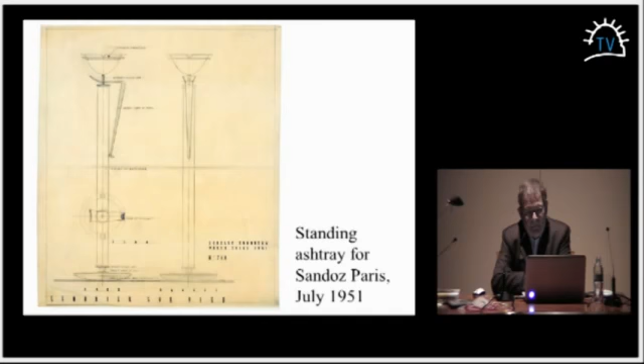This is fairly strange because it's a study for a cornice in reinforced concrete. It's studied at full scale, and it's related to the attic, the 6th floor of these labs at Sandoz at Orléans. And there you have the combination of the variation, you might say, of the sketches at a very small scale.

This is a detail of the attic. And this is a goutte pendante. This is the phenomenon: how are you going to cope with the rain? It's a joke. It is a joke. And his dessinateur, well, he was using in his office in Paris, as well as in his second office in Lausanne, his best students to do his office work. And this drawing has been done by one of his students. And this is, you might say, a caricature of the boss, of the patron. That was the word they used in French.

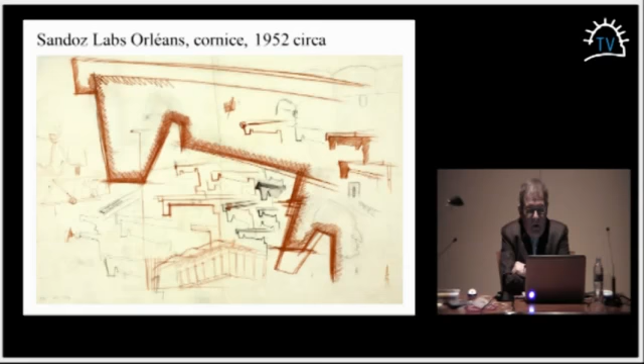Now, coming to his formation in Paris, he was integrated, or he chose to go into Emmanuel Pontremoli's atelier, and he was constantly participating in competitions. So to get this first medal, the Concours Rougevin, an annual competition they had at the school in Paris, the program itself was the study of a postage stamp. And what did he choose? He chose to combine some of the main monuments building the silhouette of Paris, whether modern or ancient buildings, and the top of the cupola here is, you probably know this building, the Pantheon.

Now, it's very impressive to look at the concentration of the intensity. We find simultaneously the use of the variante. It's a study for an armchair. It's very small. Tschumi followed the advice given to him by one of his masters, Jacques-Émile Ruhlmann. Ruhlmann was a cabinet maker. He was producing furniture in his atelier, in his shop. He's one of the leaders of the Art Deco movement. Ruhlmann's success first came into international notoriety during the 1925 exhibition in Paris.

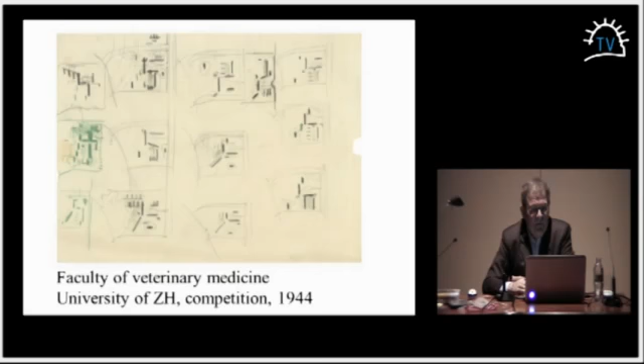But the strange thing about Tschumi is that when he's developing an architectural project, in this case a competition for a veterinary medicine hospital at the University of Zurich, he's doing exactly the same to find what is called the parti, which is the way you're going to treat the various parts of the program into a whole. So he's studying this at small scale, using the so-called, this is Ruhlmann's word, postage stamp technique, in order to participate in this competition. And there is an enormous intensity, and I would say beauty, in these sketches.

And the strange thing is, I know many architects who wouldn't keep these as documents in their archive, but there are thousands. I'm not kidding when I say thousands of such documents have been kept by the architect. Why did he keep them? Because he thought, I might want to refer to that for another commission, and so I'm going to gain time. Or I might want to give this sketch or idea to one of my collaborators, he's going to develop it, and I'll go back and see what he's doing. So he has kept everything. I know that Luigi Snozzi always eliminates this kind of nonsense. But this is full of sense for Tschumi.

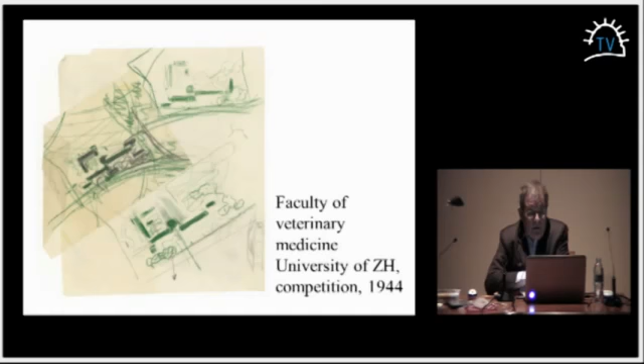I'm friendly with these people from Barcelona, Esteban Bonell and José María Gil, and they're practicing the same technique, mixing the various scales. These are sketches for a library in Lérida. They didn't win that competition. So it's a coincidence, you might say, in a way. There is a lot of precision in such a drawing. And you see the relationship between the furniture and the cornice, or the configuration of the building. This portico is like a table within the library.

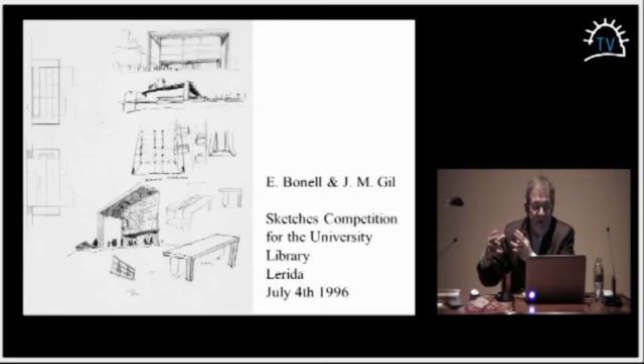Well, it's a coincidence, and this is purely empirical, and I was glad to find this in Tschumi, because I developed the research on Tschumi after meeting Bonell and Gil, and the two things were growing together. Now we arrive to this idea of another theme in architecture. It's the practice of the variante.

We are in Geneva in 1960. It's a competition for the World Health Organization, Organisation Mondiale de la Santé. And within Jean Tschumi's office, he opens a competition between his various collaborators. I'm not going to enter in detail into this program; it's a building in a park. It has a big auditorium, which you might see here. This is one solution. This would be another solution. It has a secretariat which is going to be permanent, and it has to secure offices at the moment of the yearly gatherings and discussions.

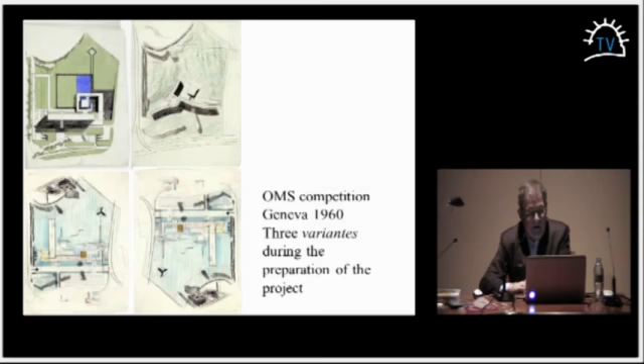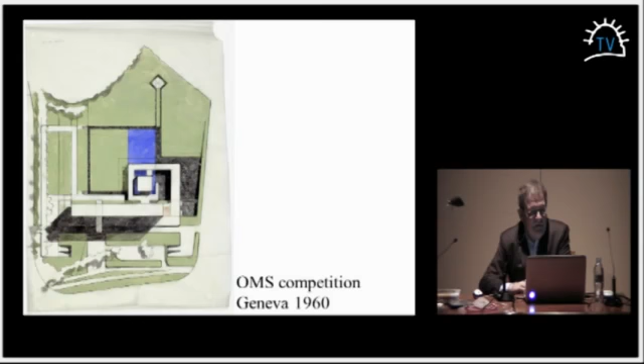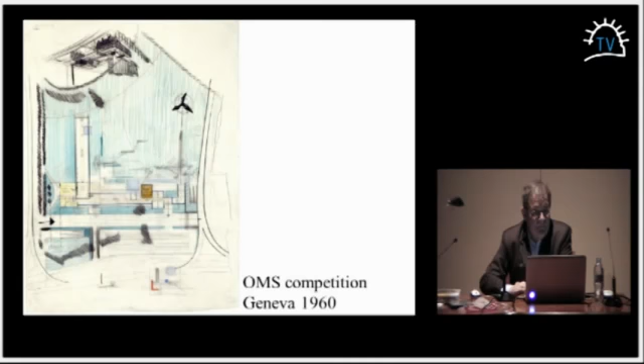Two different hands. The competition is open inside the office. And this is very interesting. North is here, but now during the night the patron is coming and is looking at the work of his draftsmen, and what is he doing? Now suppose you combine your plan like this. So this is what you're going to, because this is Jean Tschumi's hand. So are you conscious that, drawing so, you're going to build such a configuration?

Very quickly, Emmanuel Pontremoli, it shows this atelier, and this atelier was famous for the virtuosity of its rendering, and Tschumi was a virtuoso, was definitely a painter. One of the questions I asked is this habit of the variante. Is it part of Pontremoli's teaching, or is it a personal habit? I'm not sure if I can give a true answer to that, but my feeling is that Pontremoli very much wanted his students to develop variantes.

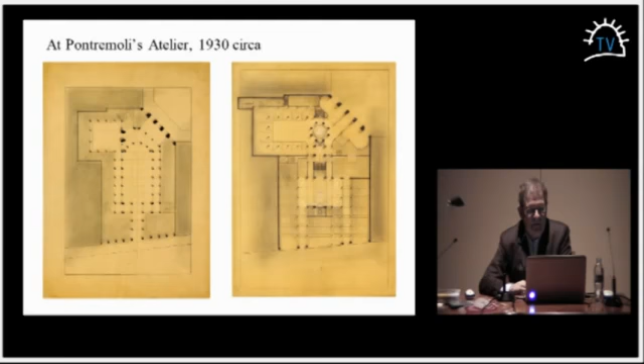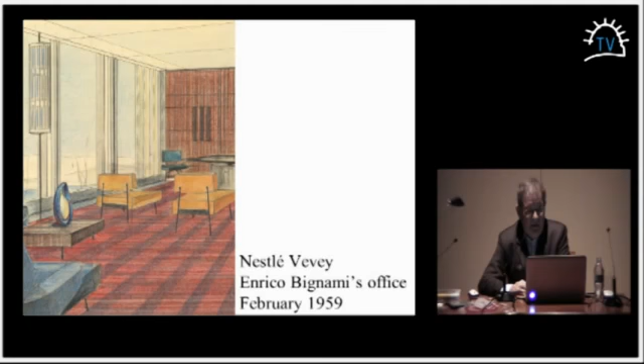I told you about the use of the variante. He was fortunate enough to be commissioned for the whole of the furniture. He was talking to one of the directors, Enrico Bignami, an Italian-born, one of the two directors of Nestlé, and said, "Now, Mr. Bignami, you have a choice between this and that. What do you prefer?" Bignami chose that. Now, Bignami identified himself with Tschumi's design because of that. He had the feeling that I'm going to decide the way the architect is going to treat and organize the program.

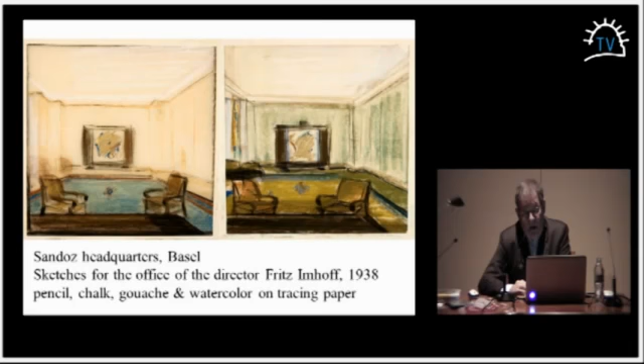Of course, in Tschumi's strategy, the main decisions about the structure, about the composition, about the organization of the plan were his. But he did leave open some variantes. This is the French word. And so he did also with the people of Sandoz. His first commission was for this building in Basel. And there you see his way of using seduction. One of the directors, his office. Do you want this or do you want that? Oh, you want this set of colors or this set of colors? He was, I would say, clever enough also to leave space and room for his colleague Sandeau, who was the sculptor, to add his own beauty to the furniture of that council room.

We're going to see Tschumi at work, and he's a man on the building place. He has an enormous interest in the technical fabrication and the use of the various material, and in particular,

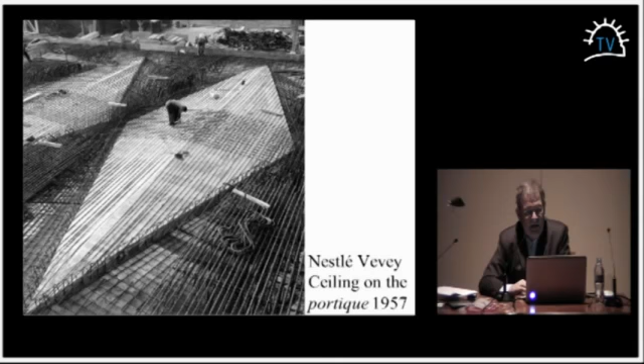This is the way he's testing, or they, because you have 2 engineers here, one for the reinforced concrete and the other for the steel frame. They are testing the building at scale 1:1, you might say. They have started to do so with a mock-up. The practice of the mock-up has developed at that moment.

There again, the picture is taken from the top of one of the cranes. We're facing the lake towards south, and you have this strange haze, which is typical of what's happening in winter. They have even to work in winter because the two directors are in a terrible hurry, as we shall see through the film.

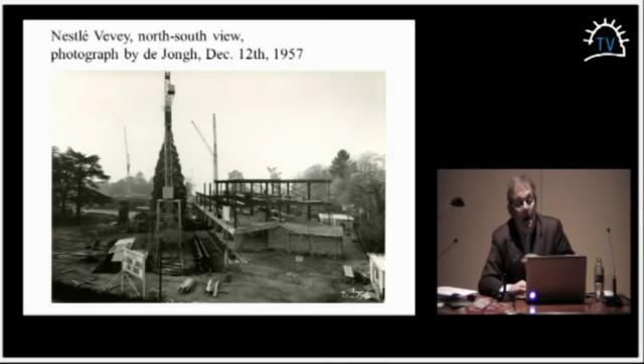Now, let us come to this competition. He was very young. He had finished his studies at Paris, at Ponts et Chaussées. He was taking part in this competition for the master plan of the center of Stockholm in 1932. It was an important competition. Over 250 offices, not only from Europe but also from the United States and South America, took part in this competition.

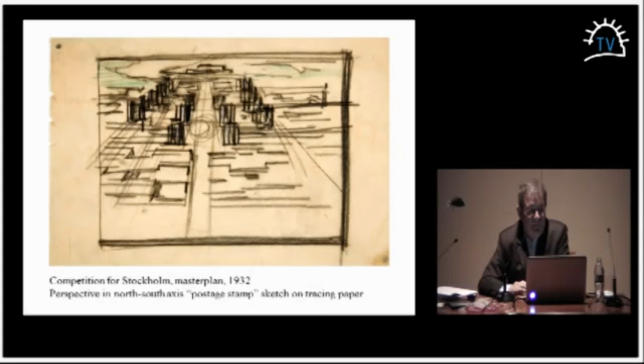And there he starts using this idea in reference to, of course, the images. This is 1922, and you recognize one of the proposals of Le Corbusier, Ville Contemporaine, 3 million inhabitants. This he had studied when he was at the Institut d'Urbanisme. This idea of the central axis where you're going to put the autopista. But it's strange that he should come to use this technique of the postage stamp to study the different variants. Well, this is rather funny.

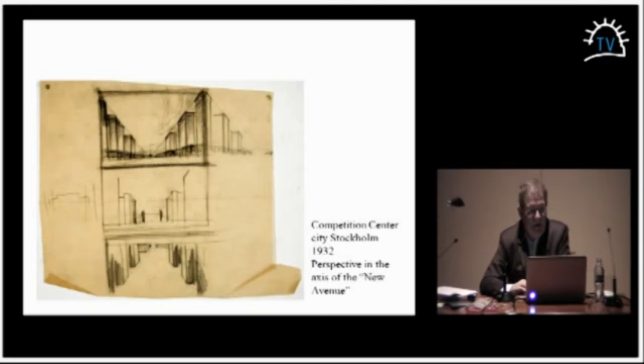Maybe it's interesting that you think you are in a plane now and you're flying over the city. When architects started to use this vision of the city from the plane, it completely changed the perception of the territory. This happened around World War I. I'm sure you cannot talk about the landscape even if you walk, even if you take the Camino, without relating to what you know of the territory from what you have seen from a plane. It's impossible.

You're going to decipher the geography from a plane if you know what the different techniques in agriculture are. There are some states in the United States where you find the presence of a grid. Now, if you fly over Virginia, you see they have copied the agricultural techniques of England. And this you see from the plane itself.

This is the way Tschumi concentrates his attention on this competition. It's roughly the north-south axis. This is the center, the Royal Palace, which is the central building you see here on this island. There are, I told you, thousands of such small sketches on tracing paper. Now, this is also interesting because it's a trace of what? Yes. One of his cigarettes has fallen upon the paper. And so the paper was burnt, and there are also hundreds of such traces in his material.

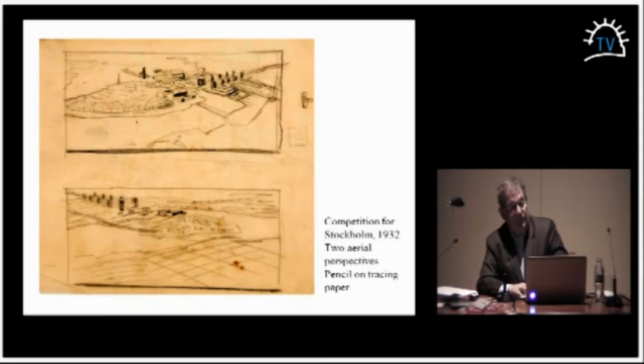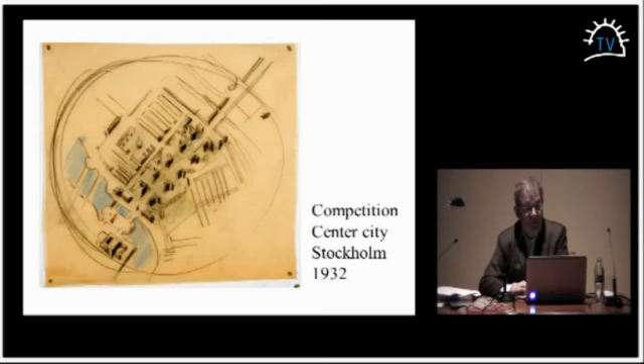This one I particularly like because it's almost like looking through a hublot, and this is one of the themes, of course, in Le Corbusier. Now, in this competition, there are a lot of variants because he refers not only to the project of Ville Contemporaine, but also to another theoretician called Hilberseimer. We shall see this in a while.

And there, in this competition, he is going to give not just one. You were supposed, yes, to draw your sketch as a photo composition, but two. And he is going to be eliminated in the first round. This is utopian. We don't need that. And he was very proud of that elimination because Le Corbusier had been eliminated for the same reason. This is utopia. We don't want this.

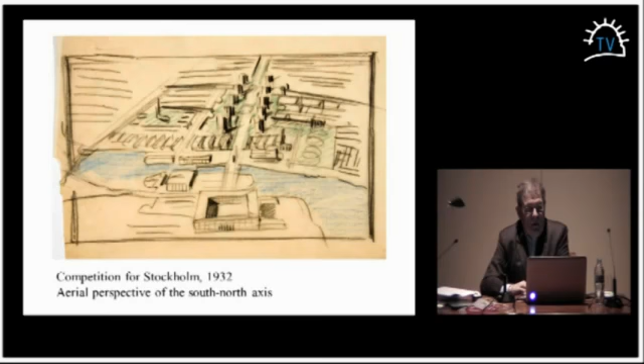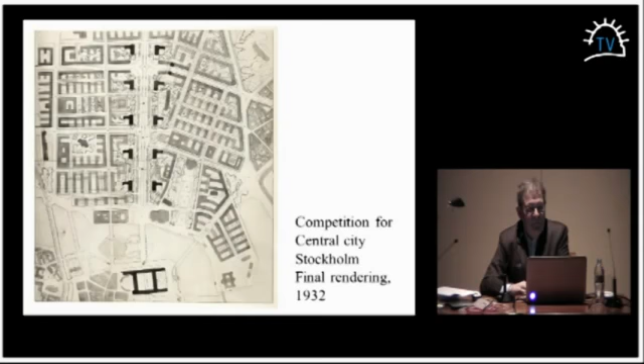Central axis. Well, in the foreground is the Royal Palace, and some of the buildings are maintained as signs in the territory, like the church or the park. The grid pre-existed from the end of the 17th century. This is one of the other references, which is Hilberseimer, and he knew that book. That book was in his personal library.

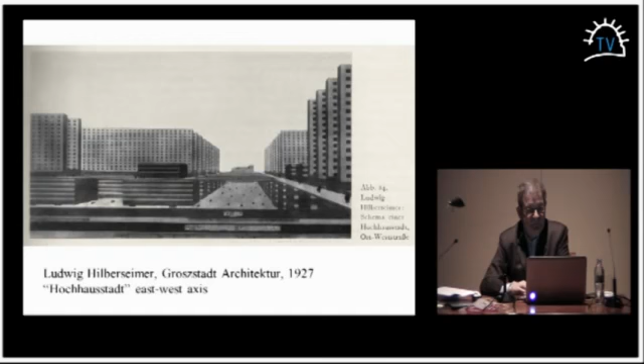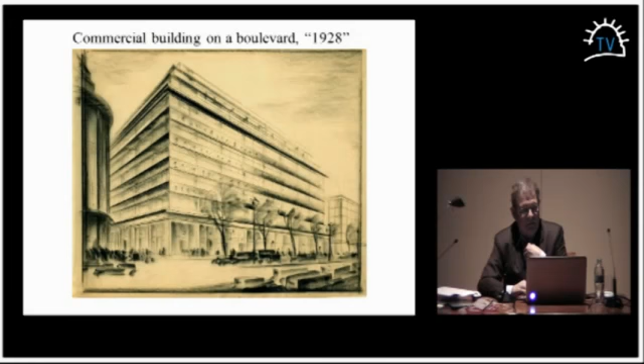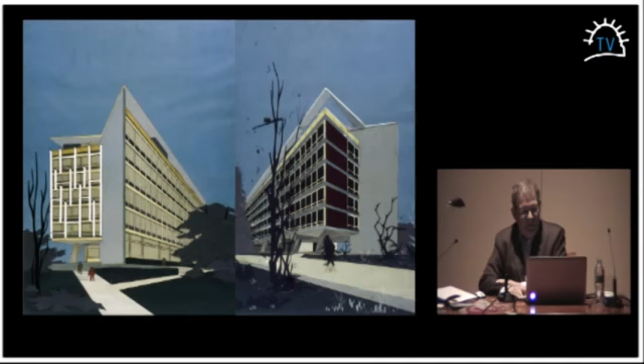he developed a strange technique of seduction, because this is a collage. It's literally pieces of cardboard. They give you a simulation in perspective of these brise-soleil, for instance. This is going to be built in aluminium, but this is necessary in order to enter into contact with these two directors. Like all civilians, you might say, they understand perspective rather than sections or plans.

And this technique is fairly strange. It's unprecedented. I haven't seen it a second time. Now, the architect asked the direction, where do you want to have it? Do you want it at the bel étage, the second floor? And you have this small protruding box. It's going to be the expression of your offices.

They say, oh, no. We don't want to appear. First, we want to be in the middle. So let us put ourselves on the third floor. And they're going to be here. We don't want to be in the attic, because the attic is too beautiful for us. We want to share the view with our collaborators, our personnel. We'll have the attic over there.

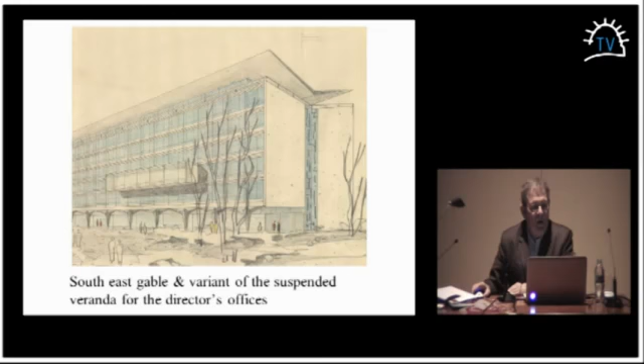Because I know the Philip Morris headquarters at Lausanne, they had one. The director was a playboy, so he had his small playboy apartment in the attic.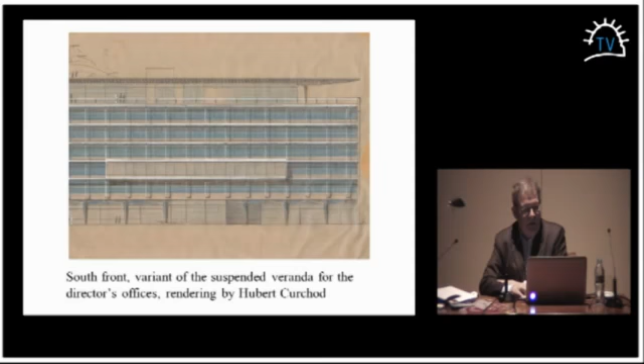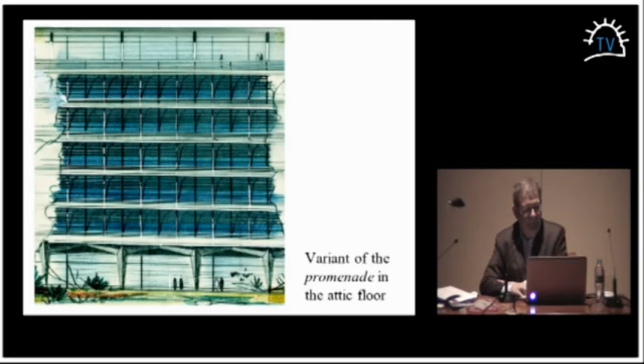This is a proposal in variant for the location of the director's headquarters on the second floor. They don't want that. These are awful drawings. No, they're not by Tschumi himself, but one of the most brilliant collaborators. This, again, perspective, I'll show you that. Do you want your office to look like this or like that? Oh, well, we'd rather have it blue.

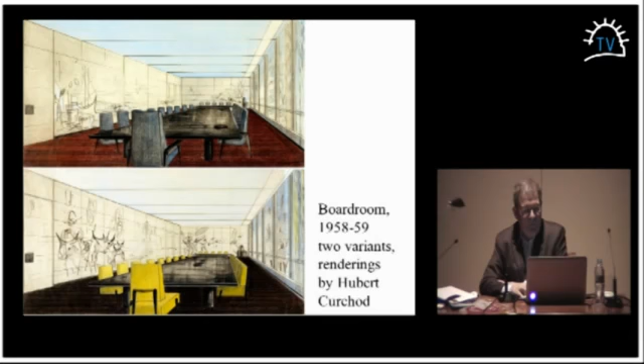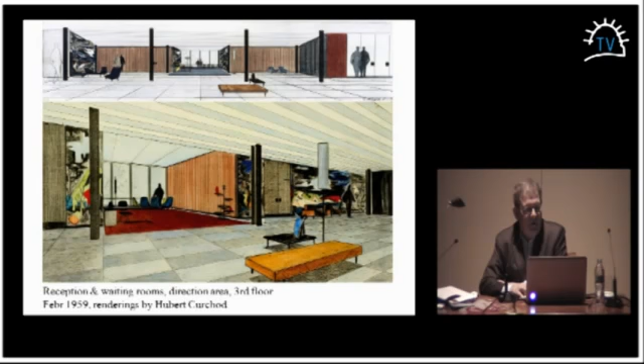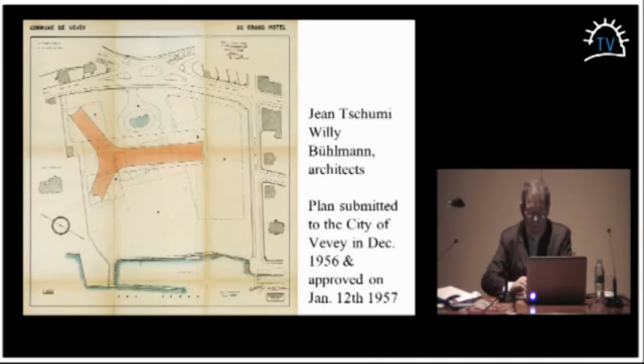You'll notice that what's happening in Paris is quite different, because this is a dovetail. It's not an orthogonal structure. No, it's a dovetail. It might make it more elegant. Everything is recuperated because they transform in the landscape. This is the underground garage with natural light, and above this the platform. This is exactly what it is. It's a platform, portico, and the horizon will be the lake. The portico on the platform.

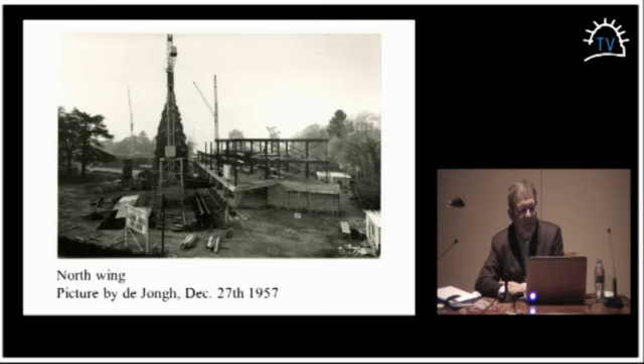The ceilings are going to be poured within the steel form, so that the form for the concrete of the ceilings is part of the structure. It's a patent which was developed in the United States. It's a very expeditive process. If the steel structure is the form for pouring the concrete, you gain time. This is the geometry of the underground garage. This was quite an innovation at that time in Switzerland. Also the strange fact that the architect wanted to bring the light into the underground garage, which not very many architects want to do. I think some have done so in Santiago.

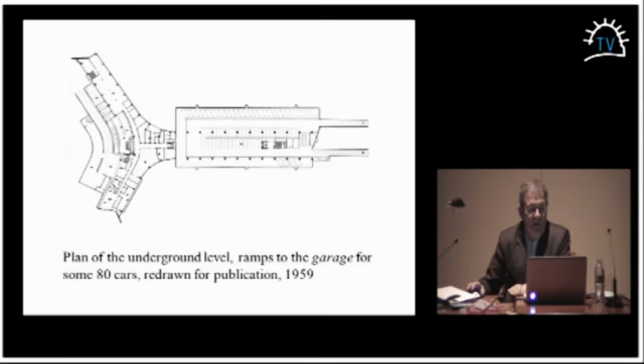And you see that there, the road going underneath, or there, there's a service road, follow the geometry of the curve. That part of the building is symmetrical. The two wings here are not. Another interesting thing here is that in this attic, you have a suspended garden. It was one of the prescriptions the municipality or the city of Vevey had given. In this part you should have a lower building.

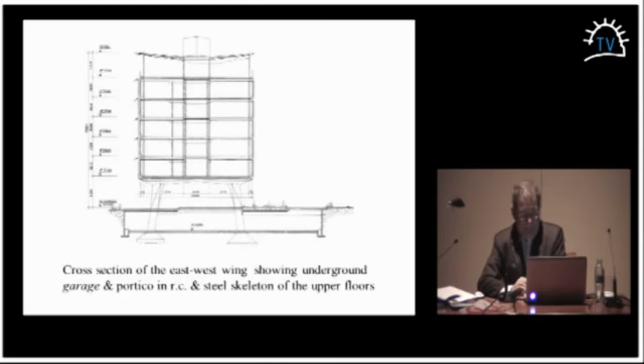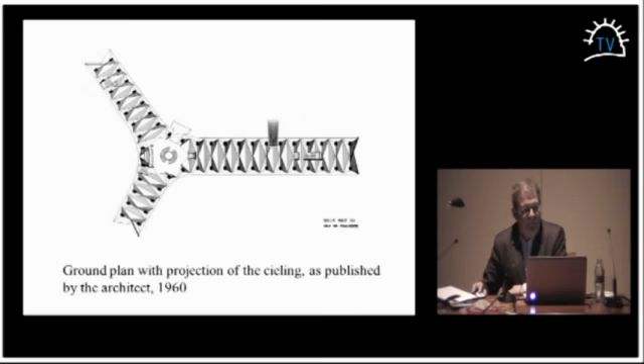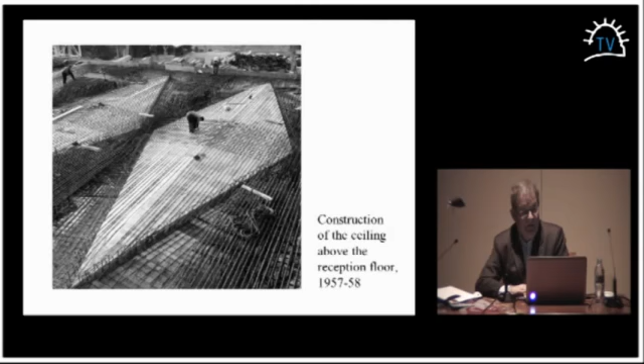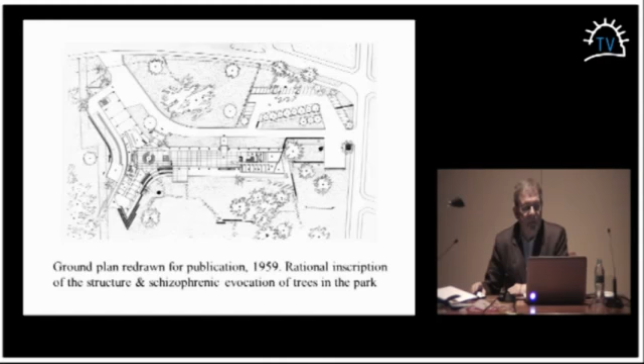You understand all this better in section. The elaborate portico with this kind of geometry, the central corridor, the lateral distribution. It is the projection of the geometry of the portico, this kind of canopy, the double staircase you'll find here, reinforced concrete treated as a sculpture, but for that it was a very elaborate plan d'armature. The dovetails, he was very proud of this

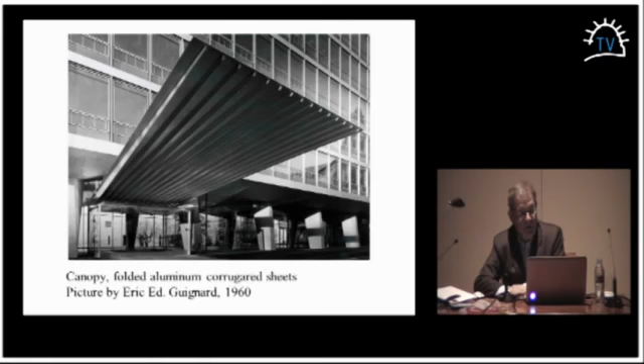corrugated sheets. It was a technique used, of course, in the aircraft industry. It opens like, you say, abanico. How do you say in English? Abanico. Yes, a fan, yes. One of the pictures taken with the Kodachrome 1960, geometry of the ceiling and its projection in the pavement. We'll look at the armchairs or look at the double staircase in aluminium. It was, well, quite an accomplishment.

I don't know if you can use the word virtuous. Is virtuosity part of architecture? I don't know. I have seen here in Santiago, there is even not only a double spiral, but you might say a treble spiral. Not far from here, which is an incredible staircase you should all go and see. There it's the museum in front of Siza's building. It's a way of controlling the non-mixture of the people. That people going to the second floor shouldn't meet people going to the third floor. No, it's not the case in Vevey, but it's probably the case here.

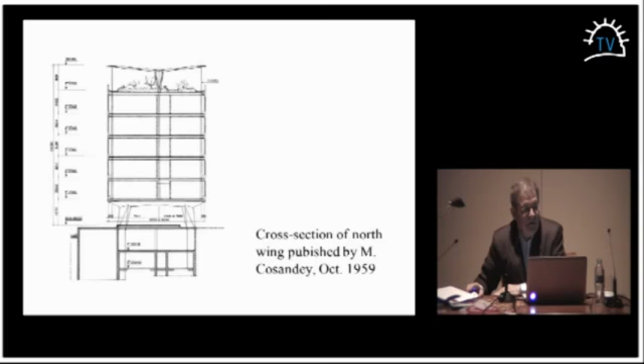This is the attic garden. And it's part of the leisure the people can do before or after the meal, depending on the 20 minutes you want to pick up for your lunch. This is the wonderful cross-section published by one of the engineers, the engineer responsible for the steel construction.

And now we enter into this comparison with the building by Zehrfuss. Of course, it was published under the name of Breuer and Nervi. You know, Nervi is the Italian engineer from Torino, specialist in reinforced concrete. Now, there is an emulation, because Zehrfuss is one of Tschumi's good friends. They studied together at Pontremoli, and it is an emulation.

Now, the reason why you find a Y here is completely different. It's a contextual building. We're on the axis of the Eiffel Tower. You find here the École Militaire. Yes. And these buildings do exist with the Place de Fontenoy. So it's a very clever way of being in context, closing the square and opening towards the park.

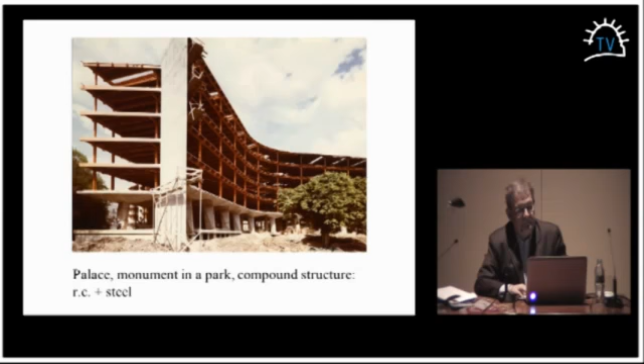The auditorium here is separated from the secretariat building, which you find here, whereas we've seen that the building in Vevey is an object, is a sculpture in a park. Again, the building in Paris is symmetrical. Here, you can see, it's orthogonal here. Also, it's very, you might say, brutal. It doesn't want to be elegant.

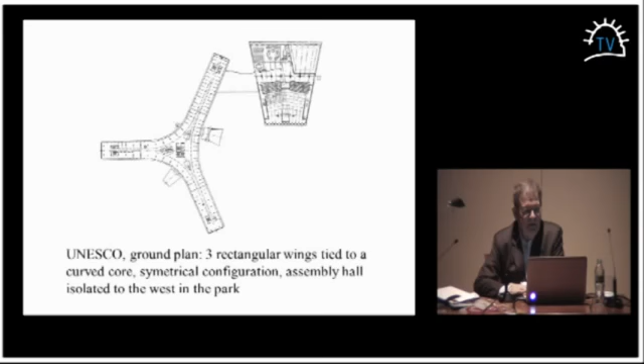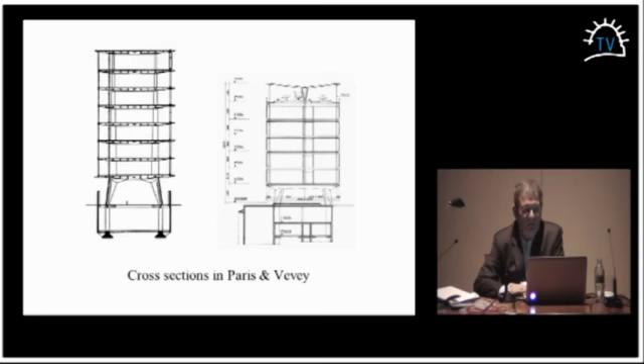We know Tschumi went on the spot, visited the building during its construction. And they're entirely different. Again, a comparison between the two situations. You see the Reynolds award, $25,000 in 1960. He has to fly to California, where the Reynolds industry is situated. The reason why he was awarded the prize was innovative value, polished

aluminium. This prize no longer exists, but this prize was directed, you might say, by Gropius. He was the president of the jury. And it was organized every year. It was quite a success because there was something like 35 candidates in 1960.

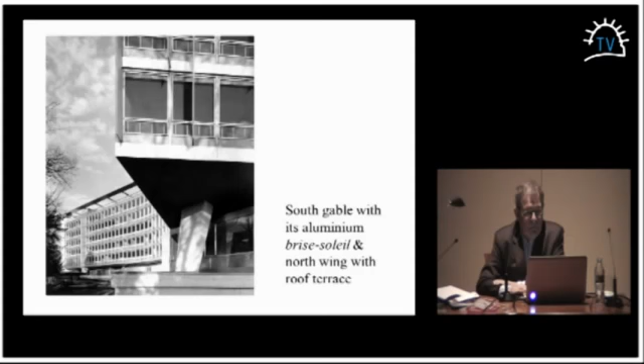Well, just the beauty of the picture. There again, the Americanism, this integration of, you might say, elegance, speed, streamlining into architecture in Europe. This might be called streamlining.

the problem is how you're going to document a building. I promised my colleagues, students, that I would try to... you cannot be an architectural historian without talking about the history of the building on the building place, on the site.